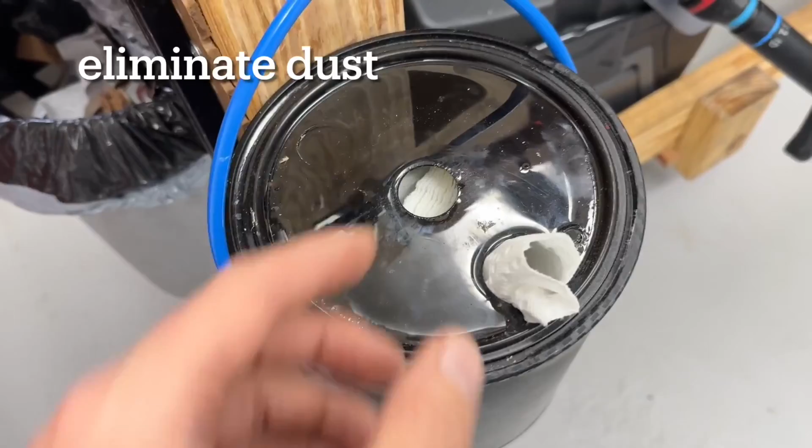Here's another quick suggestion. I keep my paper towels in this thing that I made, because I can't purchase this anywhere the way I want it. This will be the tenth time I've vacuumed off the top of this cover because it's full of debris. If I did not have this lid, all of that debris would be inside of my paper towels that I'm using to clean things precisely and very well. The debris is not acceptable.

I never would have known that source of contamination when trying to clean something off. Think about phone screens, the lengths people go to clean a screen and the gadgets invented to get every last particle of dust off before laying something down. We have loads of activities in the lab where that same level of precision is needed, no dust.

So here's a free design idea and free ingredients to make it. How do I work with this? I slice all these rolls in half, pull out the cardboard, grab the center of it, and then it's ready to dispense itself. I have two different types of paper towels, two holes in the top, and I select the one that I need. For toughness, the blue ones are better. Then I feed that through for quick, easy access.

Here's another thing. I need to clean up quickly, and there's five or ten cleanups per day, so this is important. We don't want to sit down and open up every single bin to put away a screw, so we just have a few categories. I work with M6 a lot, so I dropped one in there. This is quarter 20. When I have to put just one thing away, I can either throw it in the trash, put it in a pile where I can't find it, or... you get the idea. This saves me a ton of time. Next time I get out the quarter 20 box, I can easily sift through these few things and drop them in. If I make a mistake anywhere along here, the whole system is forgiving towards that.

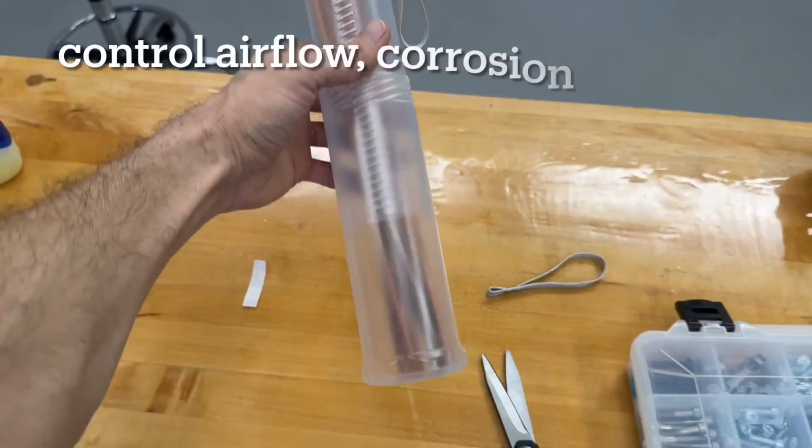Another function of the organization and standardization to note is control of the airflow. So I've done many trials in the last 3 years to evaluate how much corrosion takes place on my parts. If these need to be stored for 5 years, then I don't want them to corrode.

In some cases it doesn't matter, in some cases I need very clean, fine precision. So I happen to know that the gaps, like this gap, it does allow for air exchange, but I can drop a desiccant packet into this capsule.

Now, things that are fully enclosed are better for pre-planning than things that are not fully enclosed. If I only accommodated a drawer for this or a way to hang them without an enclosure, then I also cannot control the oxidation.

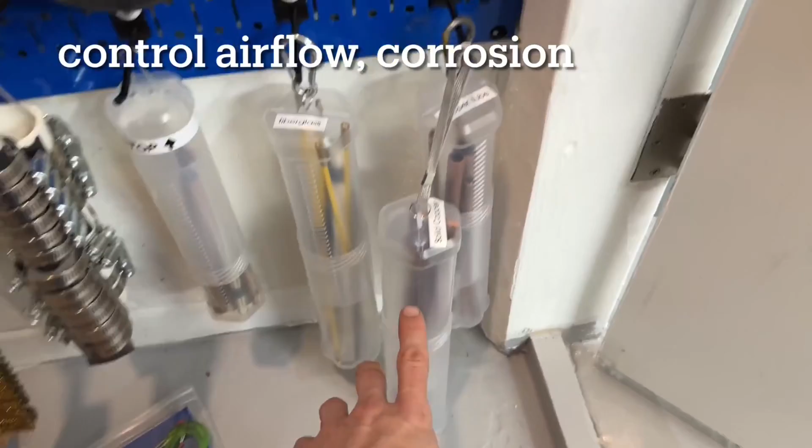So the factor that fights against that is if we're looking for things that are fully enclosed, that may be very expensive compared with the alternative options. So we need something that has a very reasonable cost to reproduce, because if I want to supply a different type of metal that oxidizes a lot, I need to be able to solve that.

This one I could quickly wrap around with tape, or I could, I have a method already to control the air and the oxidation to whatever degree I need to.

There's a tendency for some of the younger professionals, some of the younger engineers to see equipment like this and kind of view it as a cheap thing. So in their mind, we could come up with a nicer solution if we had a bigger budget, but that is not the case. It is the optimal selection for what's available right now, given our Toyota values.

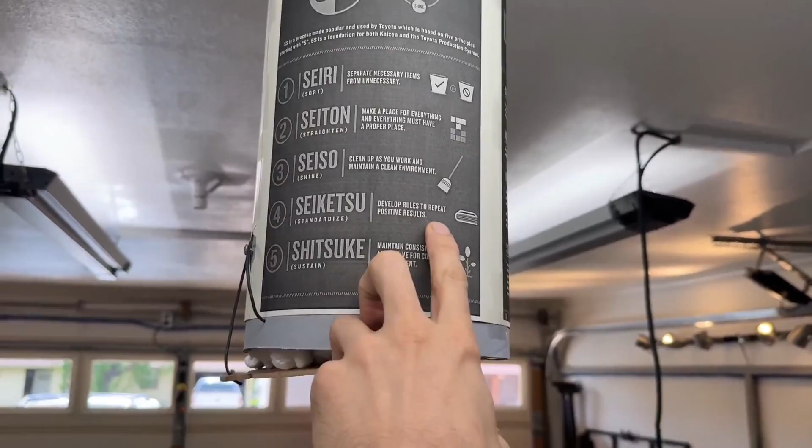Okay, this falls under standardizing, S number 4 out of 5S, and that is when we select this capsule, we find it, we decide if we want to standardize it and produce more of them, then we're asking, if we purchase this container, can we also purchase it again in 1 year?

Does it come in sizes so that if we enjoy this function, that we can find other products of the same function that come in longer sizes or larger diameters?

And so what makes this the right choice for us in this case is that those answers are yes, we can find more options for this. We can find them in different countries. And so our system of organizing using this box, this tube capsule, is not broken given all other variables changing.

So we have some shortcomings that are evident. This is a pretty cheaply made solution. If you tug on this vertically without twisting it, it will pop free. If you hang too much mass, something may break. But we don't see a higher quality standard option existing yet. I'd bet it will come out in a couple years. They're going to be making more.

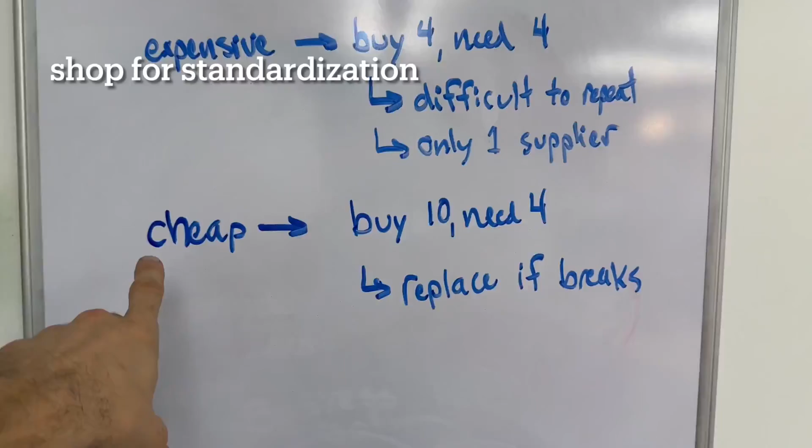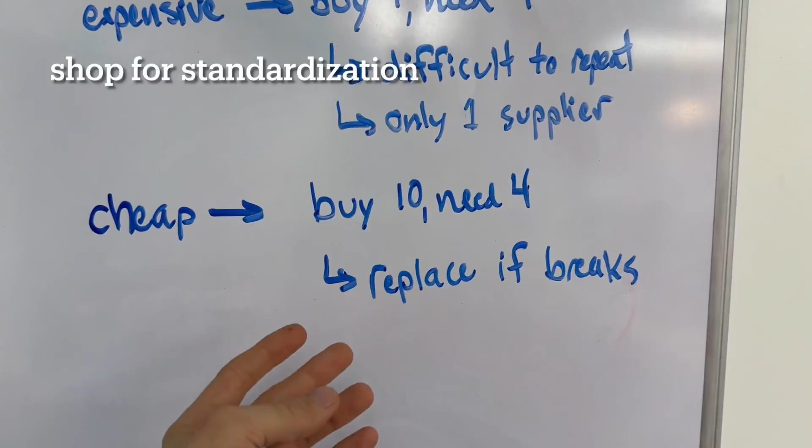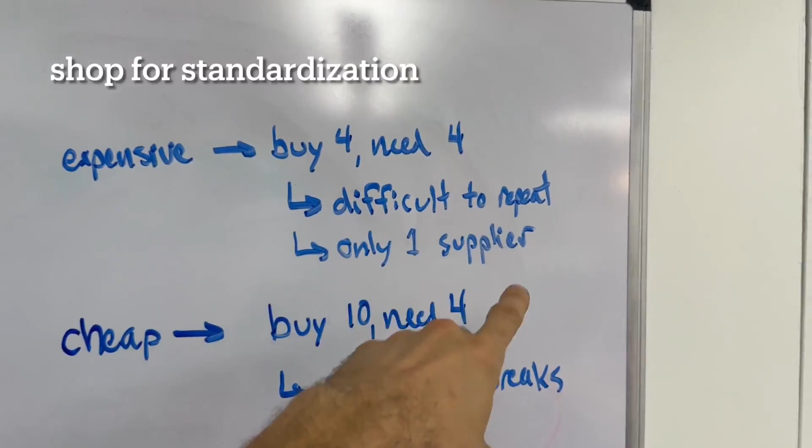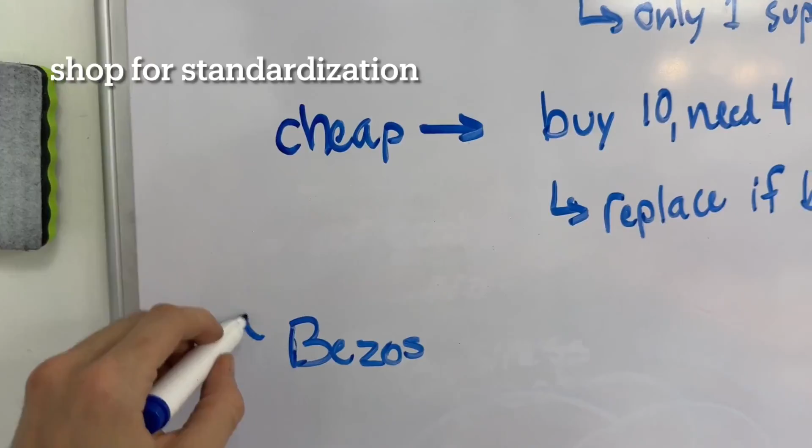This outline may help with some of the young folks. So the option that appears cheap is actually better, because first, we can buy more than we need, so replacements are ready immediately if it breaks. This countermeasures the issue of quality being less than desired. Also, because the cheap option is more standard, you can find many suppliers for it, so you don't get stuck unable to order some. The expensive version, you tend to buy exactly the number you need, and then have a harder time repeating that if you expand the lab or something breaks. So I'm telling you Jeff Bezos would make the same decision we're making here, because scalability is such a priority.

The next problem is these will get too full. There's too much stuff on my panel where I'm used to finding things. That could drop down how quickly we can retrieve and find what we need. There really shouldn't be more than like 3 hanging, because then I'm having to remove things and set them down somewhere to get at the back one.

So then we add in a data system. I removed the front panels out of these, put them all on their own card, and put number 9 on it. So number 9 will be up here somewhere. I want to know the specifications, where I ordered it, how much it was, or the size of this thing that I can't otherwise tell. Then I'll just open that panel, see number 9, and look at the back of it or whatever. Next step will be to get this scanned. Most of these are already scanned, but there will just be a QR code on the whole thing so I can scroll through the data instead of having to open it up physically.

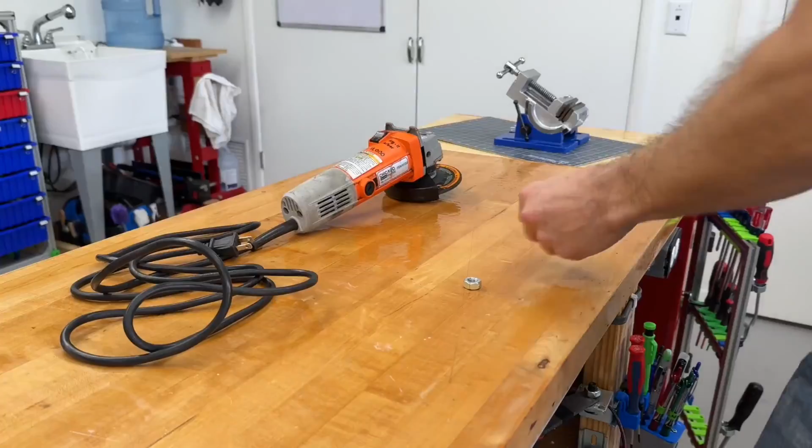Here's a tip about cords that maybe I never mentioned before. Every cord can get folded the same way. You leave a little slack between the appliance and the cord, then slide that until you have the end. Now you have 2 lengths that are equal. Fold those, now you have 4 lengths that are equal. Fold it again, and now I have something too long and too floppy. So the very last fold is either 2, if you like that length, or 3, and you can adjust the length.

See, on the very first try, I said, oh, I haven't got them equal. So without ever losing grip, you can match it up. Now they're all neat, and you don't take up too much space in the drawer. I use my bicycle tire rubber bands. If you want to store one together with this, you can cut one extra thick and say, alright, now I want a stronger rubber band for this bulky cord. Then you can put it up next to the tool in the drawer. Or if you're storing it for a long time, I'll go ahead and grab another rubber band and hold that up next to there. It just saves time when I go to retrieve this.

So I'll drop this guy into the drawer, and I know there's supposed to be space for 3 big tools here. 1, 2, 3, and I'm just leaving that space. I don't actually have a designated label for everything, but it just becomes obvious, so if someone else puts the next tool back in there, it's pretty clear. We don't label every single tool in the drawer. We label the most common one that's getting retrieved, or the largest one, which puts the image in your mind of what that drawer looks like.

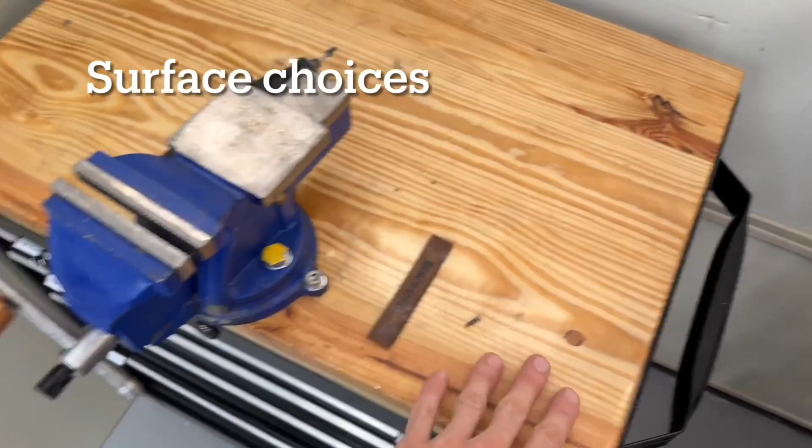Here's a quick lesson I learned about surfaces. Blonde is the color for most of these wood tops, and you can see it's shining. This one's been all scratched up, but still operates great and is still very easy to wipe clean. You're looking at about 1 year of wear and tear on that.

The reason this wood plus epoxy combination has been chosen is because it can all be cleaned and repaired, partially or fully, at any time at low cost.

There was a period when I was choosing what sort of worktops we'll need. There are factory worktops that are harder or stronger, like steel, or some of those composite desks that you have at the university and so forth. They're a little bit stronger than this, but if they get a scratch, which they will, or if you gouge it with a tool, which I have done, you can't repair it. You don't have the supplies to match the process they did in the factory.

In this case, this is like a 10 to 20 minute repair: 10 minutes to sand it down with 220 grit, no need for a second type of grit, and then a quick pour of a very thin layer of the two-part epoxy. Once you have a process for this, the epoxy is insanely affordable.

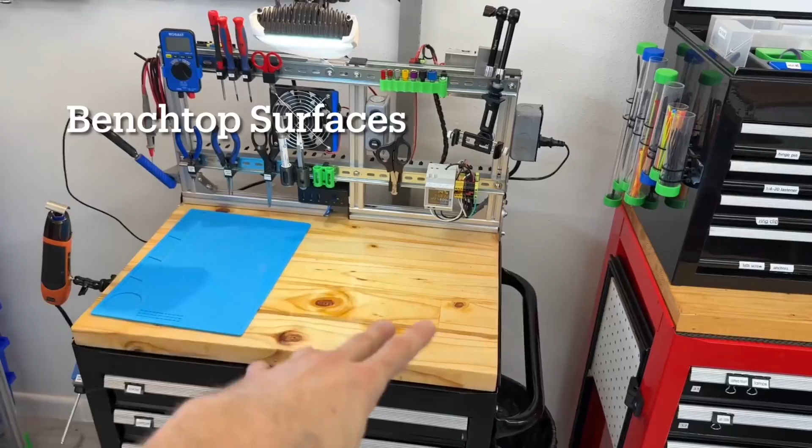These toolbox surfaces, I just wanted them rugged enough that I could place tools on there or do things on them as needed, but they were not expected to look good. So I got 2x4s, and this was the cheapest way to get a tough surface.

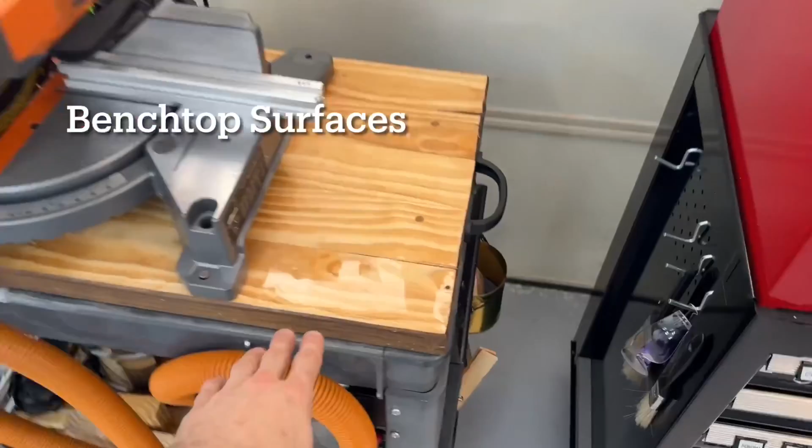Then we looked at the grain. I said, well, what can I do to just generally coat it quickly and cheaply? So I used a stain of a dark color, and the idea was to hide the variations in color. So when debris and items fall down onto it, like bits of screws, etc., they don't get lost — I don't have something blending in due to distracting color variations. And if this was too dark, I would lose parts.

But it was much better on the blonde surface when I worked in the subsequent months. So light color, just natural wood color, was fine. This is just a tad darker than the wood right when you buy it from the store — there's no stain, it's just the way it comes out after the coating.

The other requirement was that it's repairable cheaply and easily with supplies in the lab. You'll see a dowel there — there's a couple of dowels in this one. So if it got a gouge or a gnash that's messing up the surface, I'll just plug it with a dowel. Also, if I created some fastener like these ones, added a handle and changed where I put that, everything just gets plugged. It's pine on pine, or oak dowels in pine — easy, cheap, repeatable. Those dowels come in very long 3-foot sticks.

Then I ran a trial where I said, well, what if I finish one? I had just built a new work surface, and since it looked so nice, I tried coating it to see how tough this surface is. That surface is marvelous, even tougher than wood. The strength of the wood just below a very thin layer of this is sufficient to prevent most gouges — I can drop heavy things on it, no problem at all.

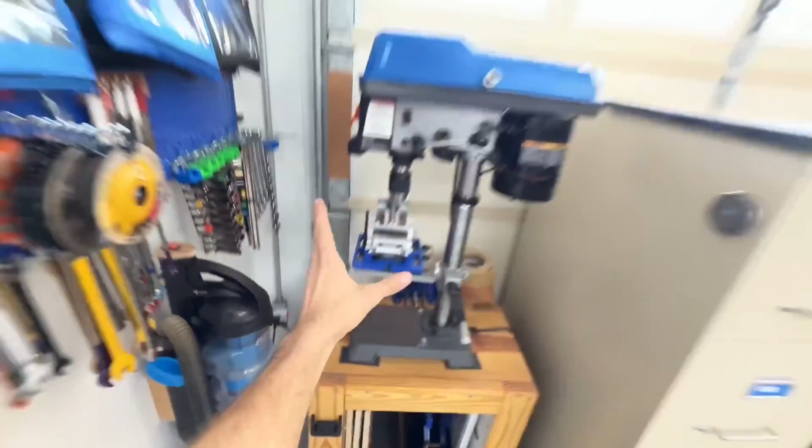And so the heaviest tool, usually I'll drive my planning by the heaviest tool. At the time, maybe I didn't have this tool, but I had these ones. So you don't need to know everything that you're going to use. You just need to know what is the biggest power demand ordinarily. Consider the last 6 months.

So each of these cords are on one circuit breaker back at the breaker panel. Power distribution is another matter regarding electrical power that supplies each of the stations or the large tools. We have one essentially on the back wall, and we have one on this wall. It's scattered in a couple of other locations, but 3D printers are sort of on their own. They're on a dedicated circuit that doesn't have only power going to the printers, but it is not going to any other large machines. And so the large gray rail on the back wall is the circuit for these printers.

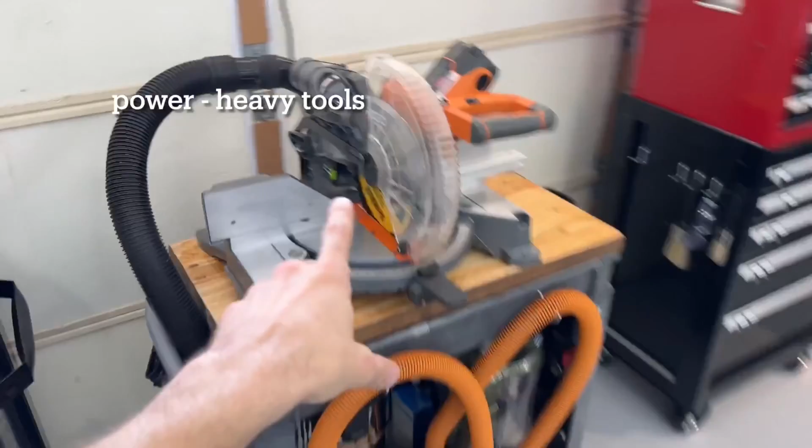The next power circuit that was deliberately planned is for this station. That's the starting point. So we measure all of our large tools. This is how you might plan this. Instead of, it's maybe unreasonable to know your plan at the very start before you're doing every action. So we measure the most high power consuming tools.

So this one was 15 amps. It's by far the heaviest power draw, current draw. We're only on, I think, a 20 amp breaker, but you can purchase a few modified. You see the gray outlets, those are rated for 20 amps, whereas most of these are only rated for 15. I've never had any problem whatsoever using the 15 amp outlets for any tool, including this one. But in any case, this one was dedicated because we know there will frequently be a high power machine on this end. And then because of that, that's why we included the 20 amp outlet.

These are only $1 each, whereas these ones are maybe $10. It's a big difference.

To unlatch the garage door, it's simply a matter of unplugging these from the wall, so everything is still changeable. We have slack hung up so that if there's a snag or a tug down here, we're not tugging to put a torsion on this connector and cause something to get bent, or just a hazard in general.

Okay, back to the planning. So we measure the highest current tool, and then we ask what else will be running in the same moment as the saw, because that would be our highest current condition of the lab being worked. So for example, I would not be running that saw and this drill press at the same time. So the next heaviest thing is a vacuum, one of the vacuums. Those have also both been measured, and we found that running those two at the same time is actually at the very peak.

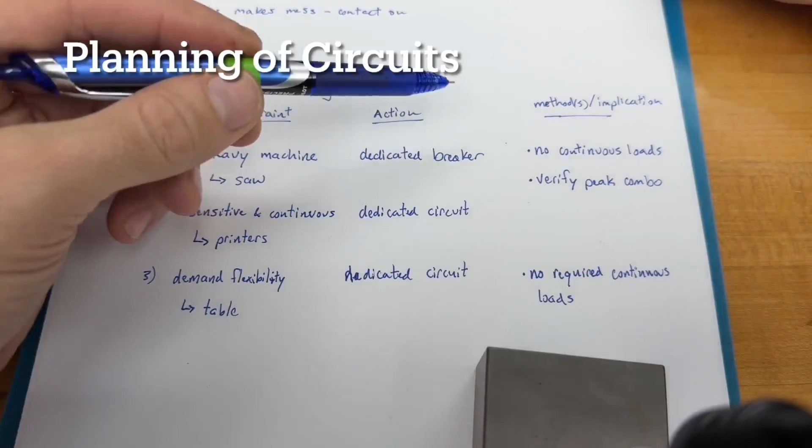This table might help simplify the complications of dedicating circuits in the lab and planning the methods together with that. We're just doing this based on how the circuits can be however they are, but we'll make a special case for constraint situations. The first constraint is there's a heavy machine that pulls current near the maximum of that breaker.

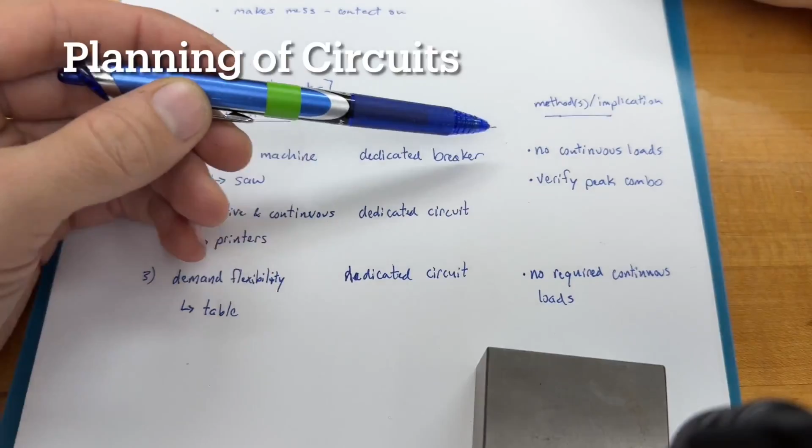The action to do in the lab setup is dedicate a breaker for that machine. The subsequent rule for operating in the lab after that breaker is dedicated is there are no continuous loads already on that circuit, such that if I want to turn on this workstation, I don't have to worry about the peak being any higher than the peak of this machine, the vacuum plus the saw. A continuous load would be something like the lights or ventilation in the lab itself, something that's going to be on regardless of a project and shouldn't be turned off. Or if there's a very small light that's always on that breaker, we just verify that the combination of this load and my heavy power tool load is acceptable.

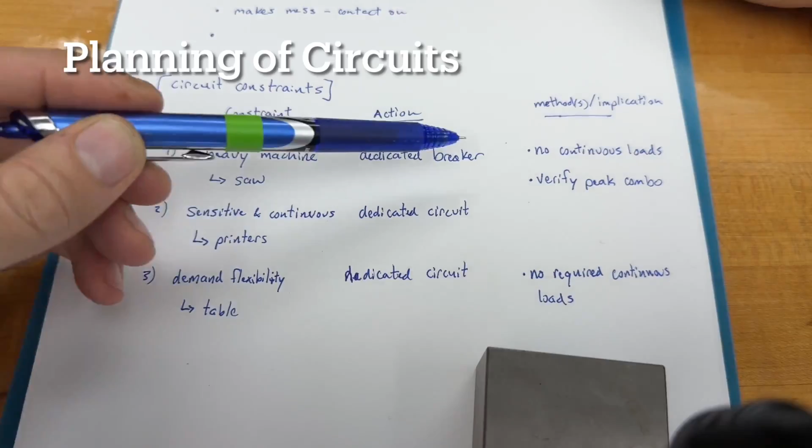Next constraint: sensitive and continuous devices. Something like a 3D printer is not a heavy power load, but it is sensitive, such that if it gets interrupted, there's a problem. The action for that is to dedicate a circuit for that set of continuous machines. The implication is, yes, you can still plug other items into this circuit, but you're either going to use heavy items when this isn't running, or you're not going to add any heavy items to that circuit at all.

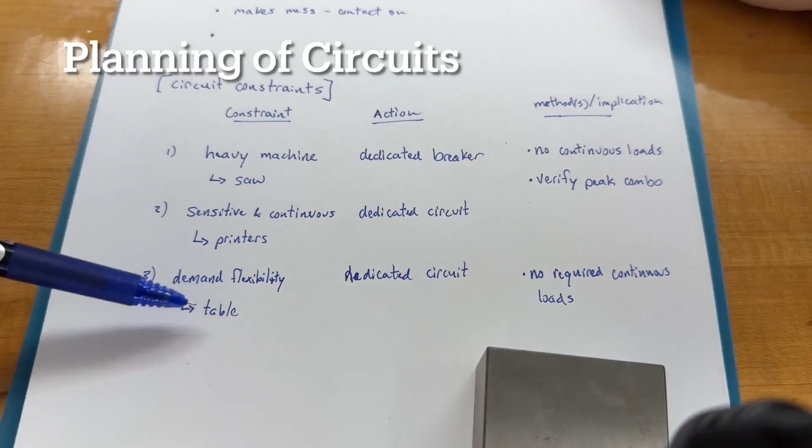The last constraint is if you need flexibility. The example is this table here. We have power outlets all around it. This work surface is a place where we want to be able to, on the fly, set up any project we want, including maybe a heavy machine that day that needs to be used. So I need maximum flexibility. We dedicate a circuit for the table, and the constraint is during ordinary work, we don't have any required continuous load, so there's not going to be something like an air conditioner plugged into this table, because that would consume half of the amperage available on that circuit.

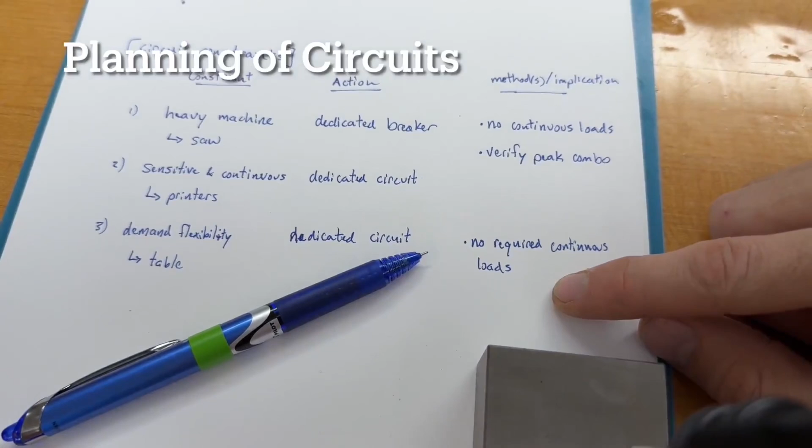So if you already have three circuits, maybe three plus one, then you don't have to do any additional wiring. Whatever number of these constraints you have, that's how many minimal dedicated circuits you should build.

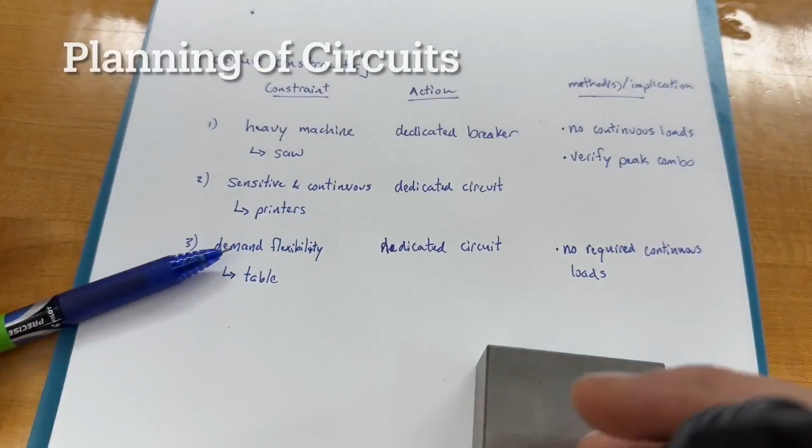So in the case of those heavy tools over here, we don't have any catastrophe if there's a problem with overloading that circuit or if the breaker trips. Whereas with the 3D printers, if the breaker trips or there's some other issue, even if we just need to power down the circuit to work on something, we'll have an interruption of an ongoing process, and that will cause a problem. So we take the circuit for the printers and put a minimal number of other devices on there.

Then we have a circuit for a more variable situation. This tabletop, with its outlets included, is essentially on its own, where the rule is essentially load it up with as many power things as we want. At special moments, there may be a heavy tool operating on there, but in general we could leave devices charging or laptops plugged in, or things that are non-sensitive to interruption but we want them to have power all the time.

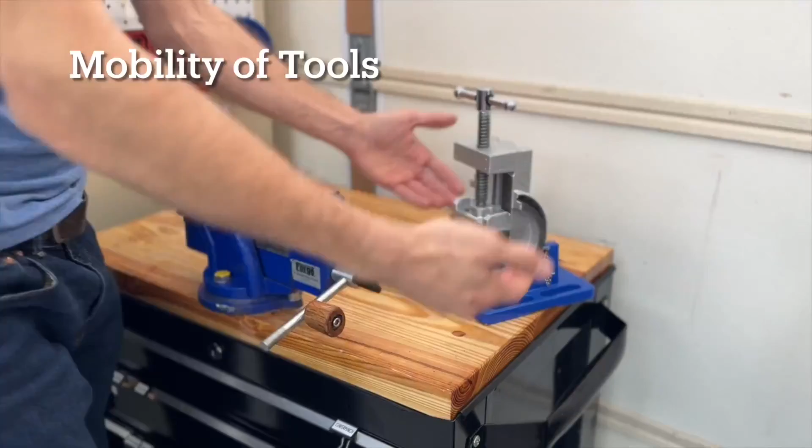Looking at mobility for a moment: some things are fairly well fixed and some things move around, like this vise, which is easy to pick up. We've actually added a silicone base to that steel so it can be set down anywhere quickly, almost carelessly, and it works out well for us.

Mobility is often decided for us by the manufacturer of the tool, and sometimes we don't even think outside of the typical box. Let's say bench vise - the word bench means it's usually going to be fixed to a bench. It doesn't move. Why is that? In most cases, the time you want to clamp something down is the time you want everything to be as fixed as possible.

No vibrating if I'm needing to file an item. But we look at our specific work and ask, do we need our work process to be fixed like that tool offers, or is it better for it to be portable? The answer is there's both realities. If we make the fixed selection for a tool or supply, it's going to have drawbacks and advantages. You ask yourself what process adds up to more advantages for fixed, so we want the fixed option, and then you're dedicating space for it.

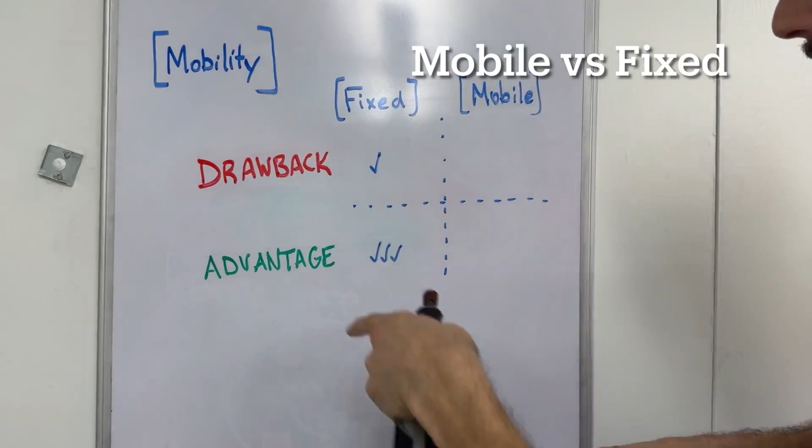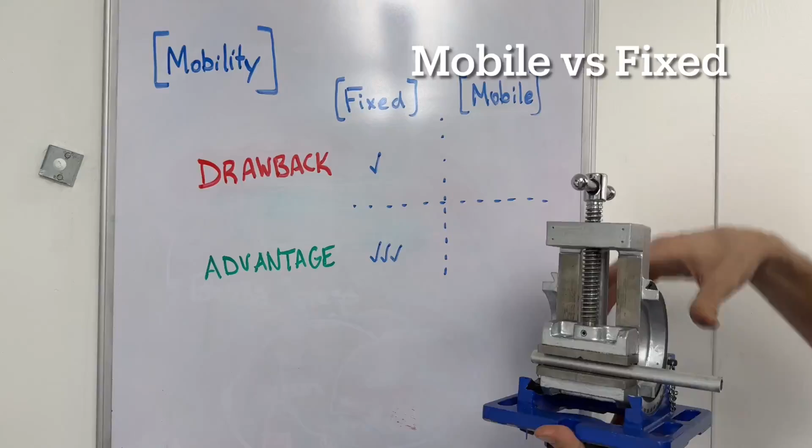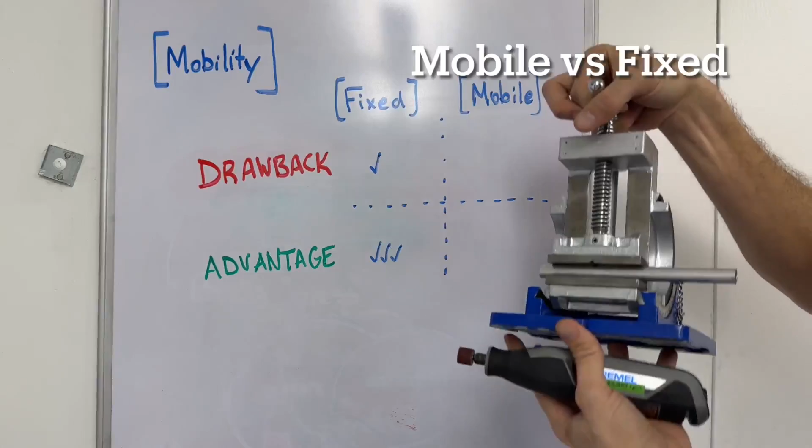So you can mentally go through the scenario where your workshop has its work done and decide: we have this vise, we've made it mobile, and the one drawback is stability, but it has a lot of its own mass, so the stability is a very small drawback, and there's much more advantage to having it mobile.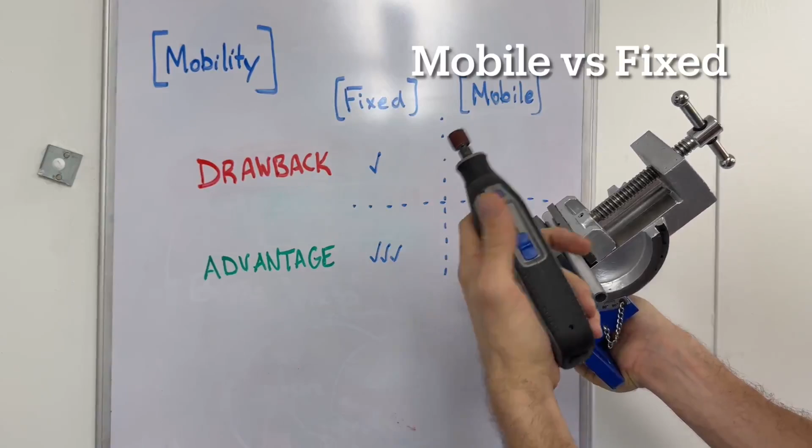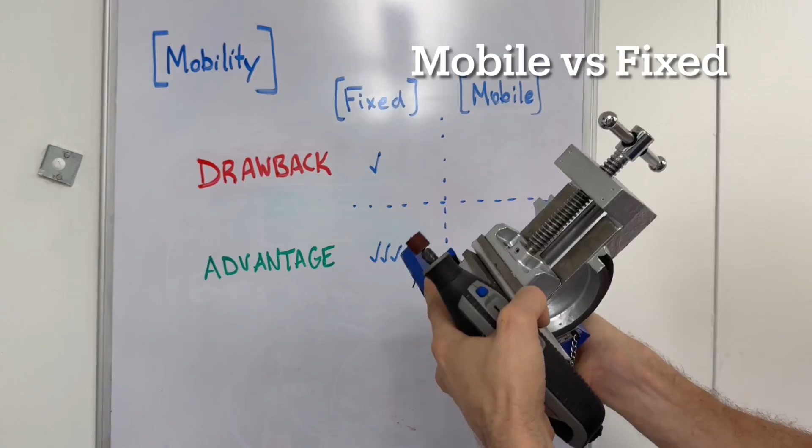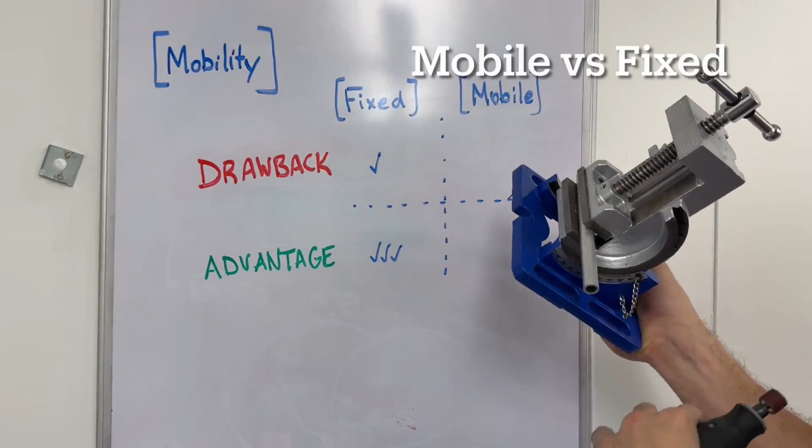So for example, the most common use - we ask ourselves what's the most common use when this tool is used - it looks something like this: small part in the vise, oriented how we want, using a Dremel or a file to do some shaping. In that scenario, the Dremel isn't exerting a ton of force. Stability is required, but we don't need the very heavy stability of the bench, the actual massive bench top. That drives the decision to configure this tool to be mobile. If we do sanding with large amounts of powder or dust flying, we can bring it outdoors or to a ventilated space.

The second most common use case for this vise looks something like this: we need to drill or cut a precise hole, and that's the reason we have this angle with the indicator for fixturing. Can we have this fixed the way we want in that situation? Well yes, because we purchased the one that has slots, and now it just takes a few fasteners to have this rigidly fixed to our workstation.

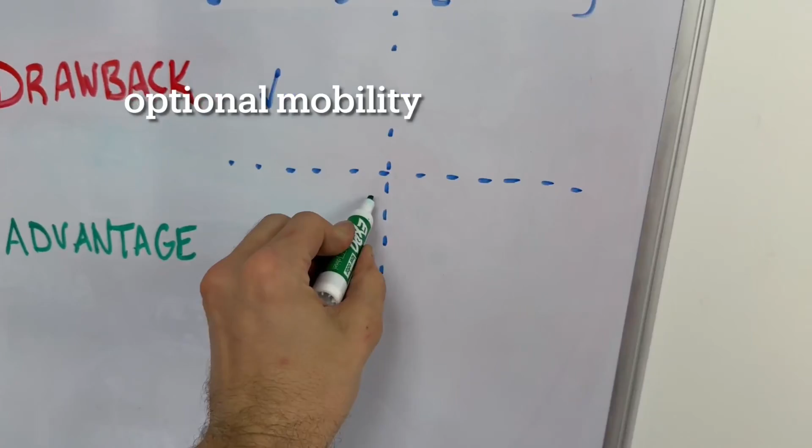So we come back to the scenarios with drawbacks and advantages, and we capture all these so we can have all the advantages whenever we want them. That's kind of doubling the effectiveness, or the number of situations where the task is served by the tool.

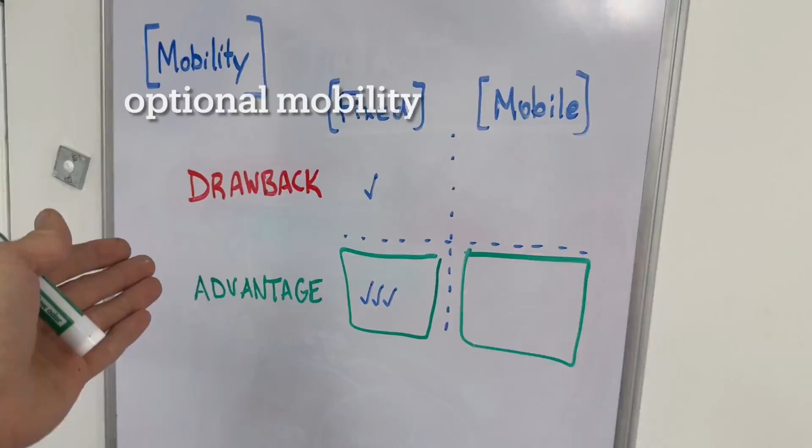So right here you're looking at the opposite situation. The tool typically comes in a way that's portable - there's a simple 2-prong plug on the back, it just goes into any outlet, and we can bring this wherever we need to do the heating. But this is the heat gun that we use more often than any other task: it's shrinking down heat shrink on a wire. When we're building wiring, we're usually here doing the soldering as well.

So in order to gain some advantage, we say okay, let's invest in setting up a fixture where this can live. Now we get this one advantage of having it fixed, and that advantage is hands-free adjustable positioning. So that gains us an advantage, and we lose the portability because now it's actually wired into the station.

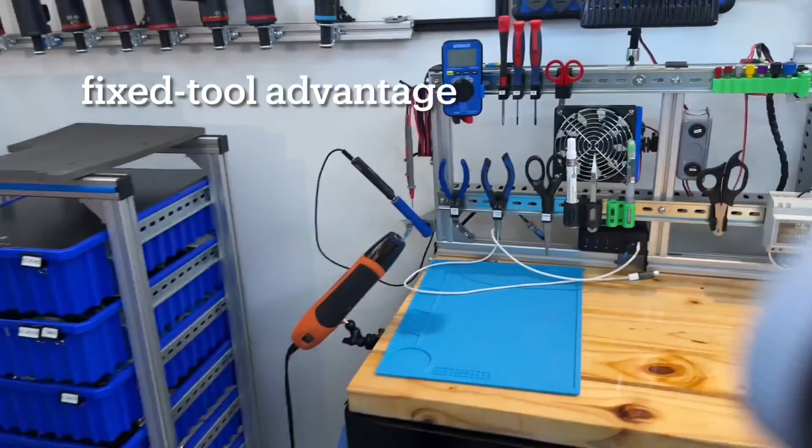That's a separate goodie - since it's wired into the station rather than just plugged in, we have this quick switch, an extra additional hand. Usually the helping hand fixture gets us one free hand because it's held in the right orientation, and this lets us use our knee to hold things with both hands and have it quickly turned on and off. That's all just based on use case - we usually just need this for 5 seconds at a time, so we'll do this switch, and it's wonderful. I love having this thing.